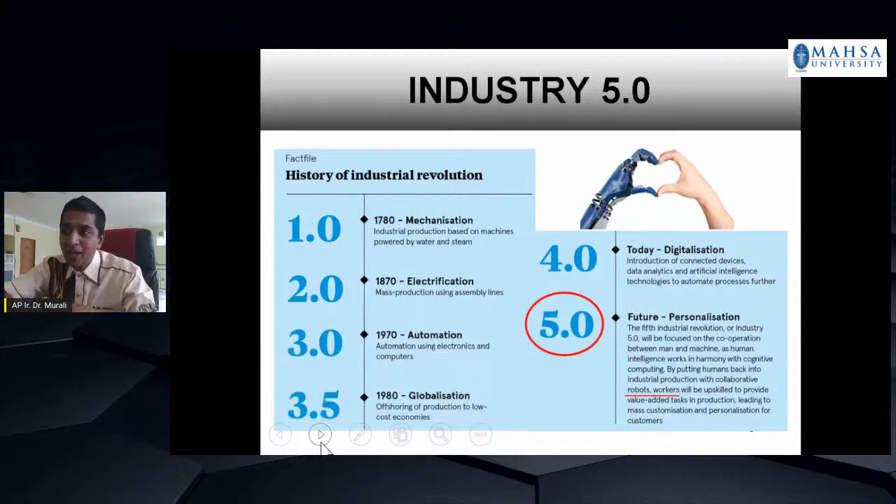So that's what I want to highlight here. What I want to share with you today is a bit of an overview of robotics. I will talk about the history of robotics, because we need to know where it started and why it's going in this direction. Then how they classify robots, some basic applications of robots that are very important nowadays, and also some essential preparations we should all have to be ready for the coming future.

Now let's look into the overview of robots. Robot history started in 1921 with Karel Čapek. The word 'robot' actually came from a play. 'Robota' means servant, or subservient labor.

So in this play, they created an electromechanical robot to show that it's possible. This was actually the first introduction of robots in the world. It came from a play.

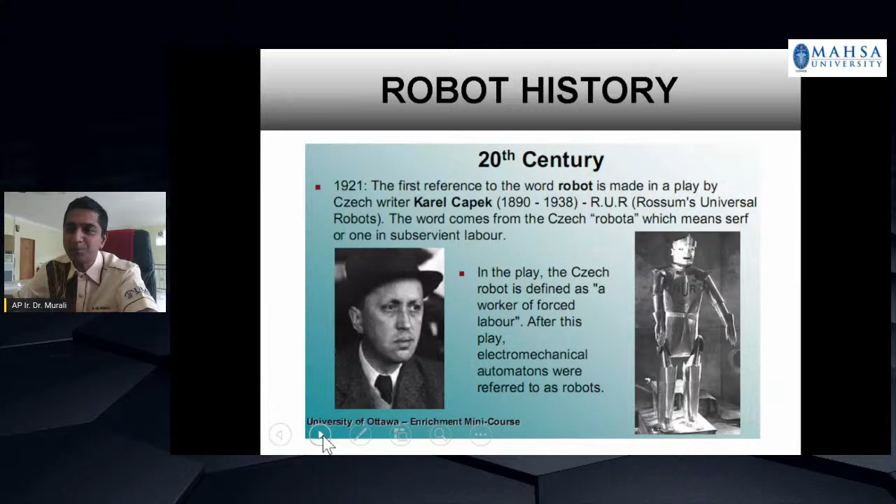Then in the 20th century, in 1940, 20 years after 1920, the first robot was created by Westinghouse Electric Corporation. They created a robot and its dog companion, named Sparko. This dog can walk, stand, and bark.

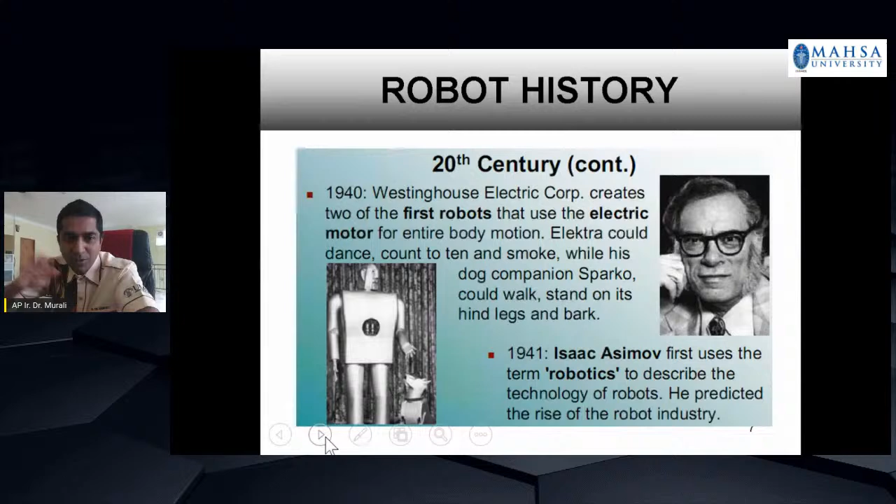In 1941, Isaac Asimov, whom we call the father of robotics, coined the word 'robotics,' the technology of robots, because he saw that robots would rise in the very near future.

Then in 1968, 20 years later, we have the first mobile robot, created by Stanford Research Institute. This robot uses a camera, rangefinder, and sensors. It's called Shakey, the first mobile robot that could think and respond to the world around it. That was a great breakthrough.

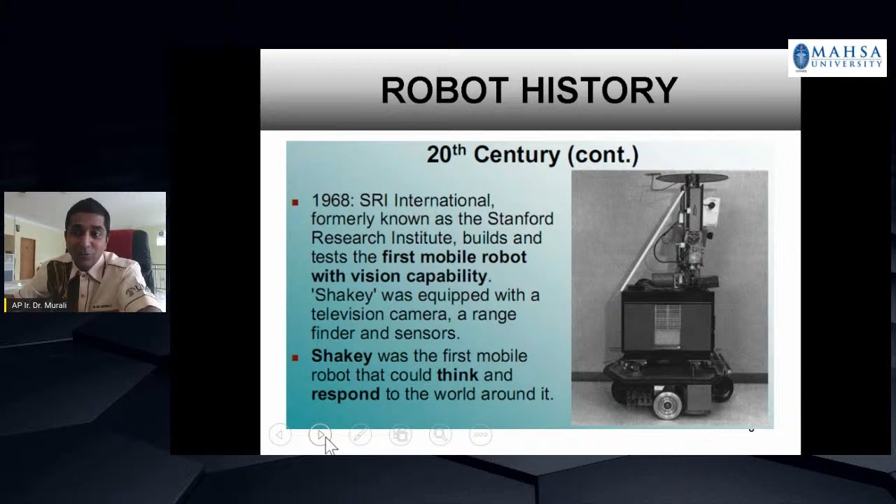In 1969, again at Stanford University, they developed the first electrically powered, computer-controlled robotic arm. Professor Sheinman later, in 1974, founded the Vicarm Incorporation. This arm is actually used in industrial robots, for assembly.

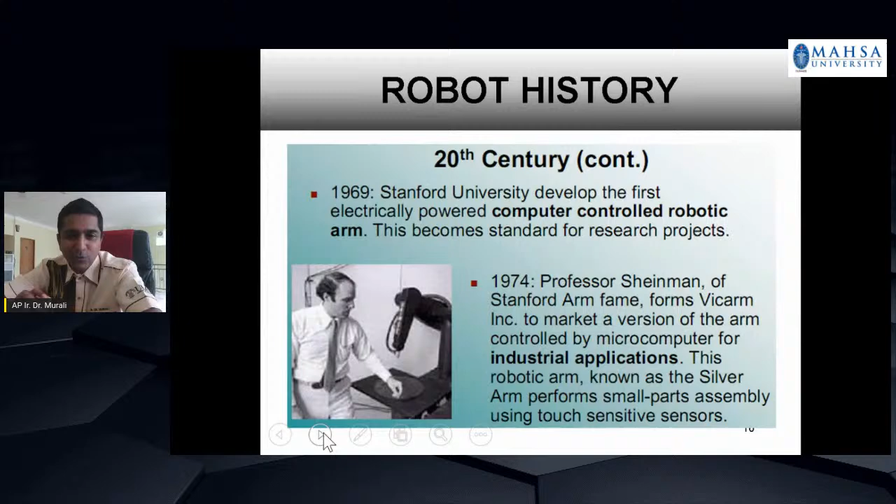But the first robots were actually used for welding, because welding is very dangerous - gas welding and metal fume - so it's dangerous, dirty, and dull work. Basically, robots were created to address these 3Ds: dangerous, dull, and dirty. If you can put something there to do all this job, that's where the robot came from. That was the initial part.

Of course, we watch movies, right? You can see how people imagined technology developing into the near future, like in movies such as Robocop, Terminator, Transformer, Knight Rider, Real Steel, Stealth. All these things exist now, but not like what you see in the movies - they are there, being applied, and being developed.

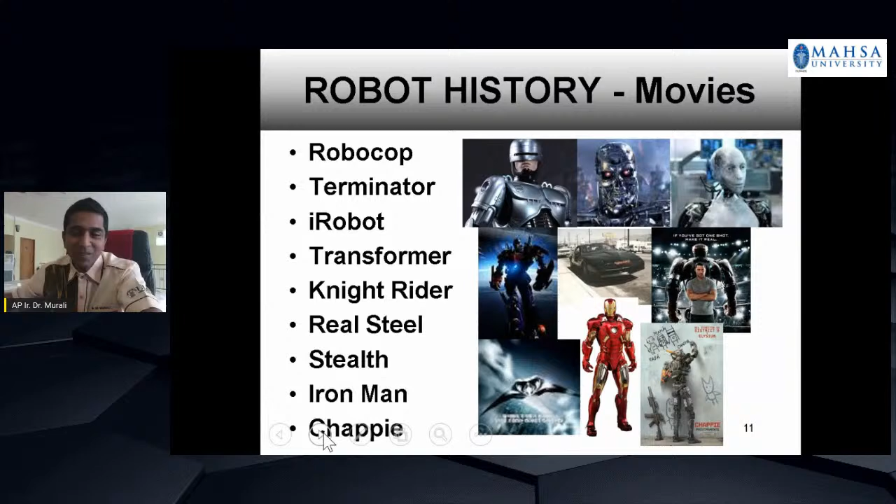So these are the interesting parts. Now, how do they classify robots? How do we classify robots?

First, I introduce to you Tele Robots. Tele Robots are those guided by remote control by a human operator, like a remote control car or remote control airplane. You control the robot, so we call it the Tele Robot.

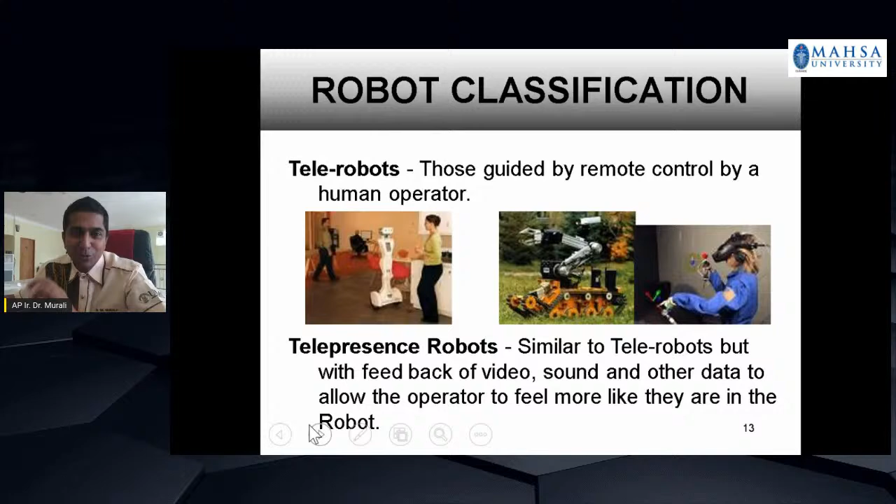Now there is another one, telepresence. Telepresence is also a tele robot, but it has visual feedback, video feedback. That means you can feel that you are actually driving the robot, or that you are the robot moving around and doing things. Later I will share with you the applications of it.

Then the other one is the static robot. This is where it started from. It's widely used in industries, factories, laboratories - it's an industrial arm that does a job.

Then we have another one, the mobile robot. This one moves around in the environment, so it can navigate by itself without any human intervention. It uses tracks, wheels, and other platforms.

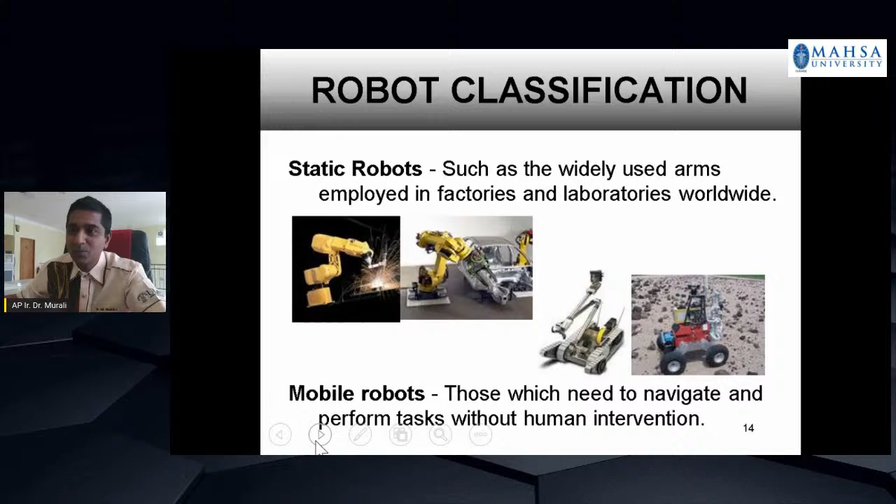Then we have the autonomous robot. An autonomous robot is a robot that can do the work on its own - you just program it and it does the job by itself. We have lawn mowers, we have the Roomba, a vacuum robot that can vacuum your house. All these things do work on their own, that's why we call it an autonomous robot.

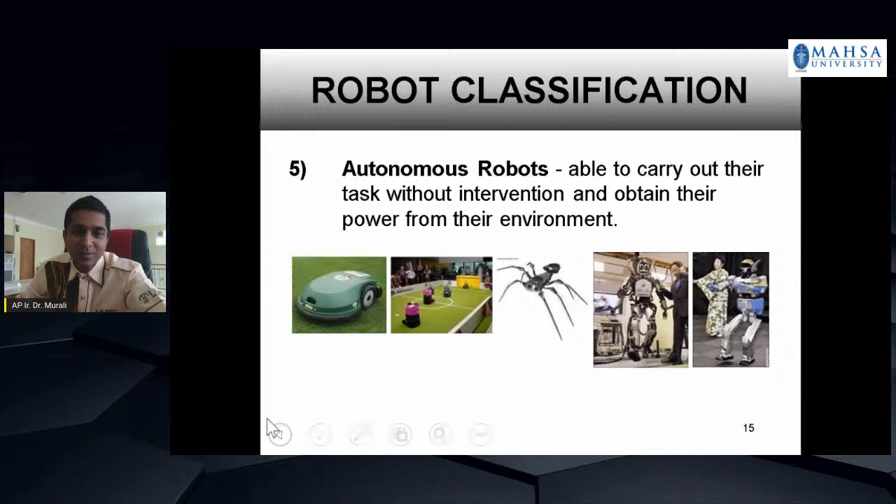Then we have what we call aerial, underwater, and space robots. Now, all of these are also mostly autonomous. They have to have some degree of autonomy, because in case the signal or communication is cut, they must be able to navigate by themselves, make decisions, and maybe return to the home base.

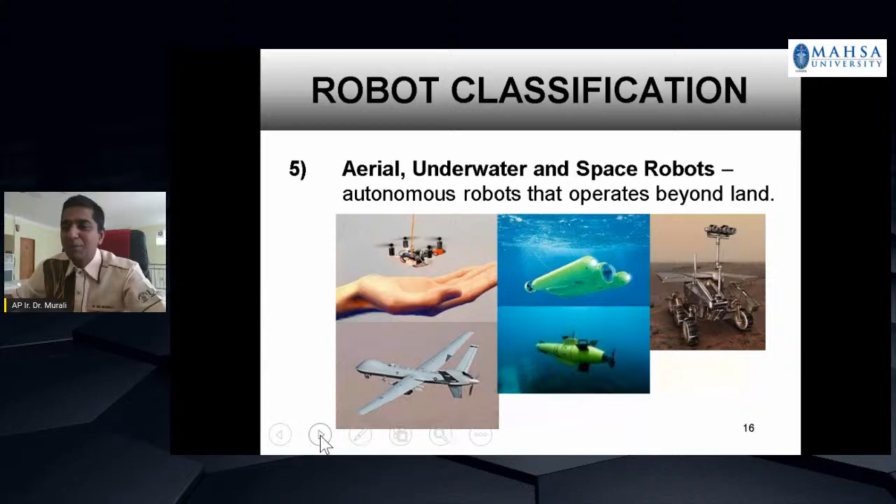So you have deep sea underwater vehicles, tiny drones, and big drones that do military tasks. And then you also have the Mars rover, which is sent to Mars, which definitely has to be autonomous and has to communicate with people on planet Earth. And then we also have androids.

One of the most advanced androids that we have currently is Asimo, by Honda. Asimo can climb stairs, can hop on one leg, can kick a ball, can run, and can recognize things.

We also have Sophia, who is the world's first robot citizen, where it has a very high human-like behavior, maybe not physically, but intellectually. And we have NAO, the toy robot or educational robot that we can use to learn and also to do research upon. So there are many types of androids available in the world, and these are some of them.

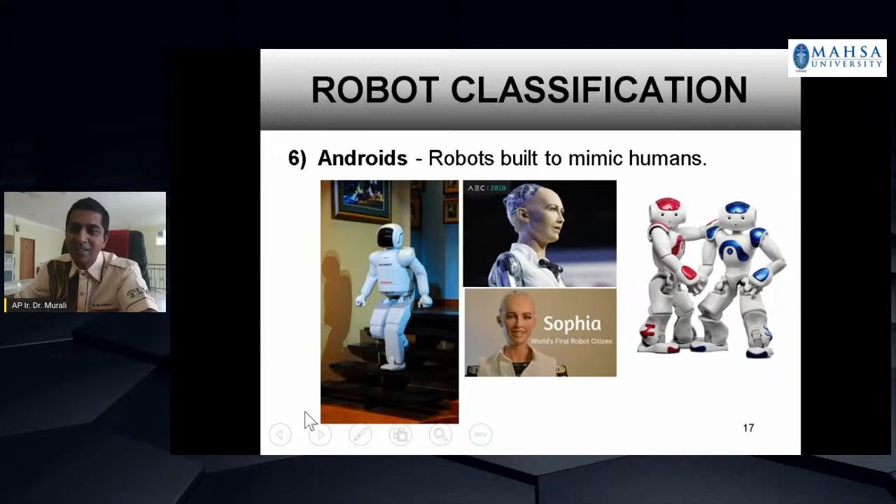Something very interesting: we have restaurant cooking robots. The restaurant name is Spyce. As you can see in the picture, this is the restaurant where people sit and order food, and then the robot cooks by itself. It puts all the ingredients in, cooks, and serves. There's only one chef; he will check everything is okay and make the final touch. Every meal is customized for you—of course there's general cooking, but it's customized for you. So the sprinkling work is done by the chef, only one chef. That is why I said that in the future, you still need a human being to do the final touch.

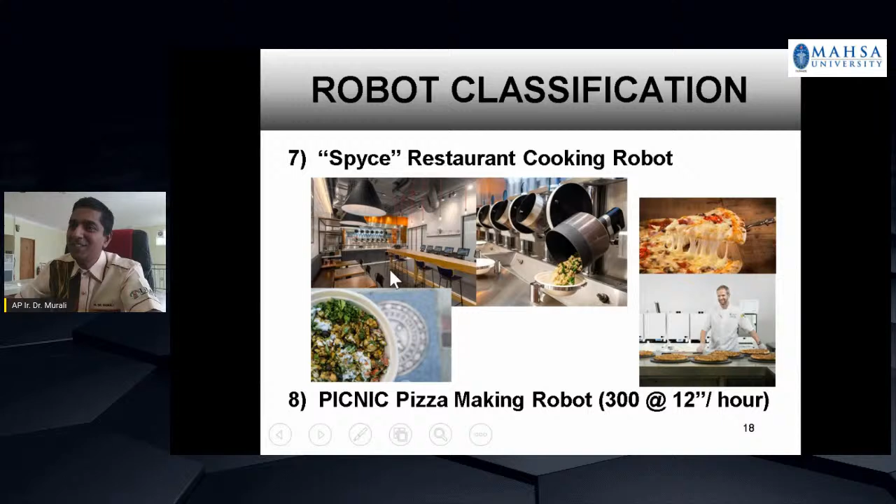We also have this PICNIC pizza-making robot. Imagine a robot that can make 300 pizzas, which is 12-inch size, quite big, in an hour. This robot can do that repeatedly. So these are very interesting robots that we have in this world.

And of course, where all the money is spent, where all the technology is currently being developed, is mostly on military robots. We have drones, military soldiers, alpha dogs—big dogs to carry things—and then automatic tanks which can go and target enemies, and automatic sentries, which they use at the borders.

And then we also have medical robots, which I will share with you a bit deeper later. We have robots that can operate on people, robots that can sanitize places. And also we have pet robots. People who don't have pets, who cannot have dogs because it's a bit messy, they have pet robots which interact with human beings, can be programmed and made to do whatever you want, so that small babies or kids with disabilities can learn to become normal again through these pets.

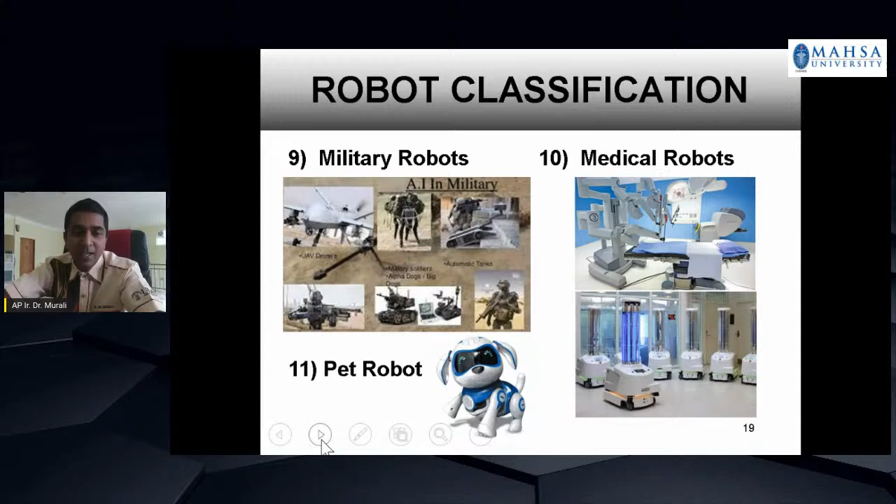So that is what robots are all about, how we classify robots. Now let us look into the application of robots. First we will look into industrial robots, because industrial robots is one of the widely used robots in the world—manufacturing and all these things really use industrial robots, so this one we cannot run away from. When a person wants to study robotics, if he really wants to know the architecture, the application, the concepts and everything, we normally start with industrial robots.

Then we go into mobile, because mobile uses different platforms. But industrial robots has a very unique understanding. So why industrial robots? You can see here, this is in 2017—this statistic is from the International Federation of Robotics. You can see how much robots are actually being used, and it's replacing employees. On average, the global average is 85 robots per 10,000 employees, globally in the whole world.

We have a lot of usage of robots in Korea, because in Korea one of their greatest revenue generators is in the field of robotics. That is why in Korea, one of my colleagues shared with me that every state in that country has a university that works on one special type of robot—maybe one state works on medical robots, one on industrial robots, one on some other type of robot, to generate revenue for the country. That's why the technology is advancing so fast. Of course, Singapore and now China is picking up, and China has already gone very far too, using robots in industry very widely.

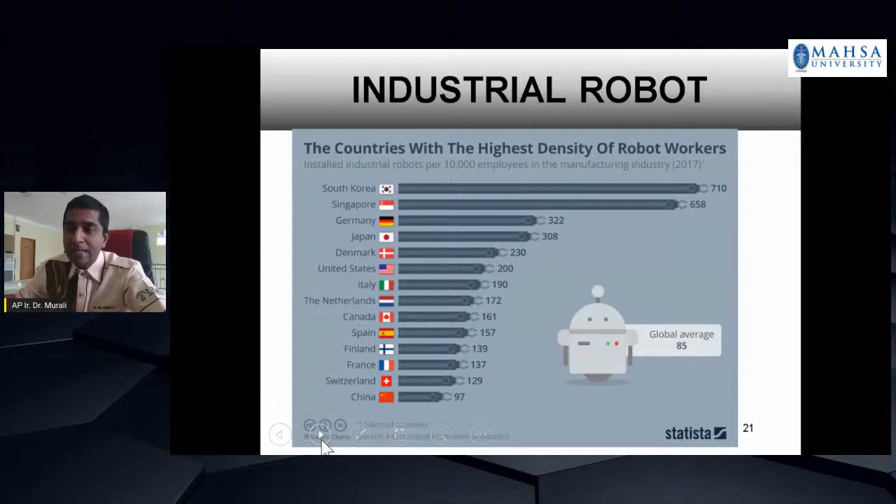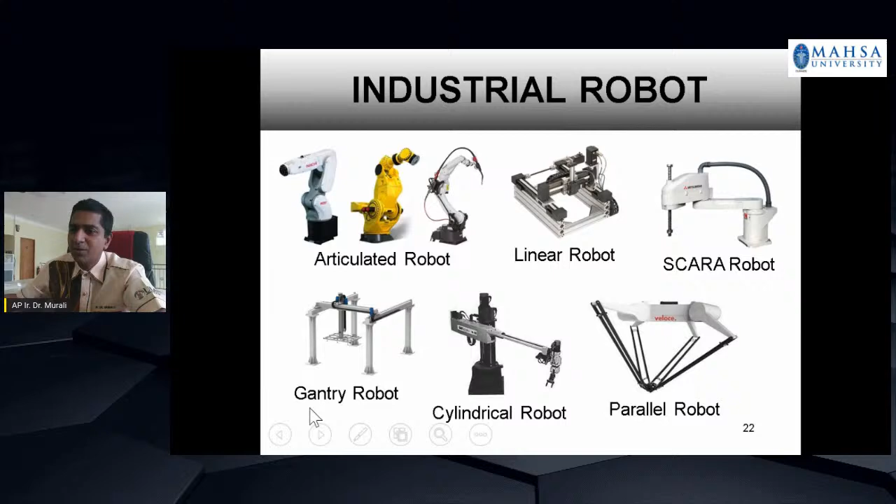So this is about industrial robots. Now, the latest trend in robotics mostly works on the area of collaborative robots. If you have an industrial robot arm, it's very dangerous, because the robot moves very fast and doesn't have any sensor to detect whether you are there or not. So they have fences, a workspace you cannot enter. It's very dangerous. So now we have collaborative robots.

Another one becoming very popular nowadays is drones. We have material transfer robots, automated guided vehicles, and drones. Nowadays people are buying online for many reasons, not only because of COVID. Even before COVID, people started buying online, and we have big factories, stores, and warehouses where we need guided vehicles to pick up objects or purchases, and robots to transfer them.

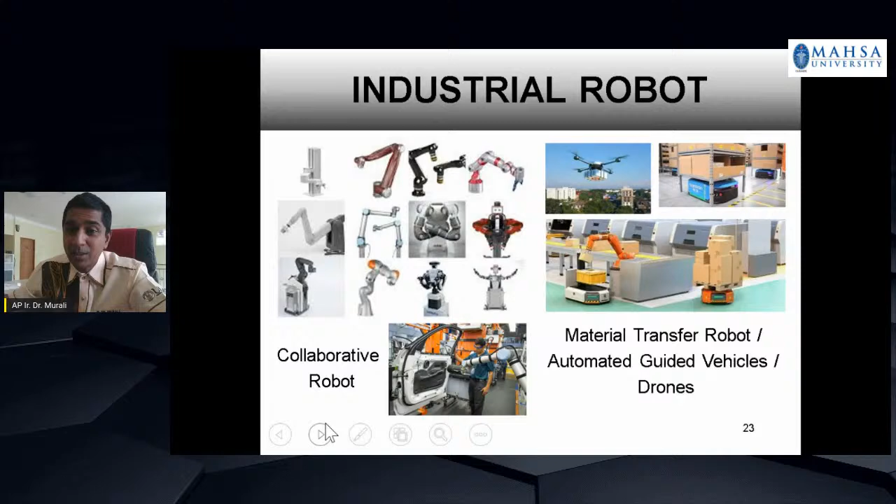If we study industrial automation, we learn that around two-thirds of the cost of the industry or product actually goes into material transfer, either from robot to robot for manufacturing, from robot to customer, or from the source to the factory. So when you use robots, you generally reduce the cost of the product you are buying. That's why many things we buy online are very cheap, because they've tried to minimize cost by using automated systems and robotics in their warehouses and other areas. These are the things we've covered, and it's still developing.

Now, industrial robots are used in a few key areas. The first is material handling, like material transfer, pick and place, palletizing - meaning arranging the materials, products, and output - and machine loading and unloading. You use robots to load products to machines and also unload them. Robots can do this very fast, very clean, and very accurately.

For process operations, you have welding, spray coating, cutting, and grinding. For assembly, you have fastening screws and nuts with multiple orientations - it can fix up, down, left, right, at very fast speed.

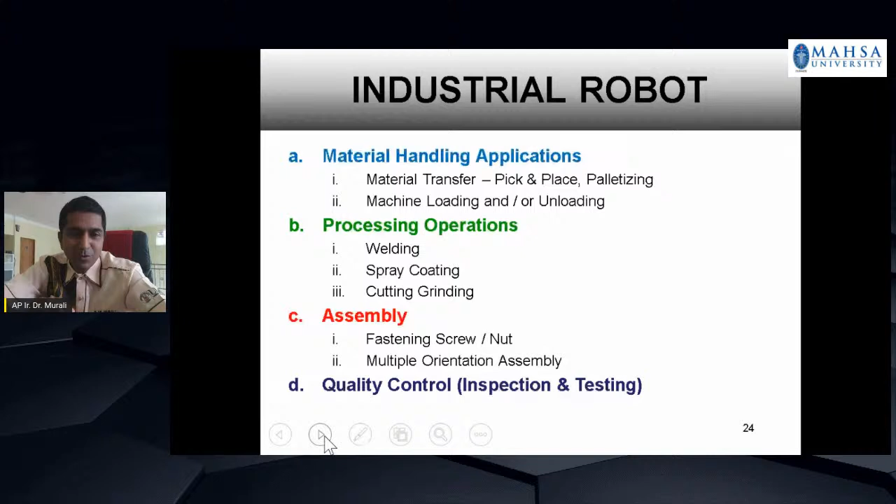Robots are also used for quality control, inspection, and testing. We have many robots, and they have been using it for many years. Because of this application of robots, we have products which are very high quality.

This is a guide to show automation and computing, which involves robots working together hand in hand, because you can design something virtually on a system. We call it computer aided manufacturing, CAM. You can design it, do prototyping, then 3D printing, and then production. All these things can be done by robot: prototyping, printing, and production.

Then of course you have assembly, and you can see now we have blockchain involved. And then you have delivery. You have robots to deliver, tracking, and also distribution. And robots sometimes also do customer service.

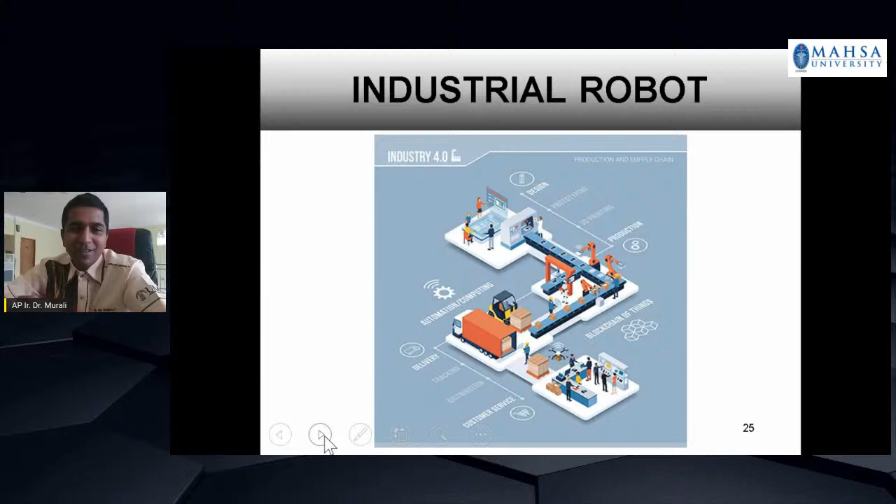Sometimes you open your website and you have somebody to talk to you who is not a human being. It has some intelligence, a software robot, where it communicates with you. So these are the things that we have in industrial robots. Now let's look into other applications of robots.

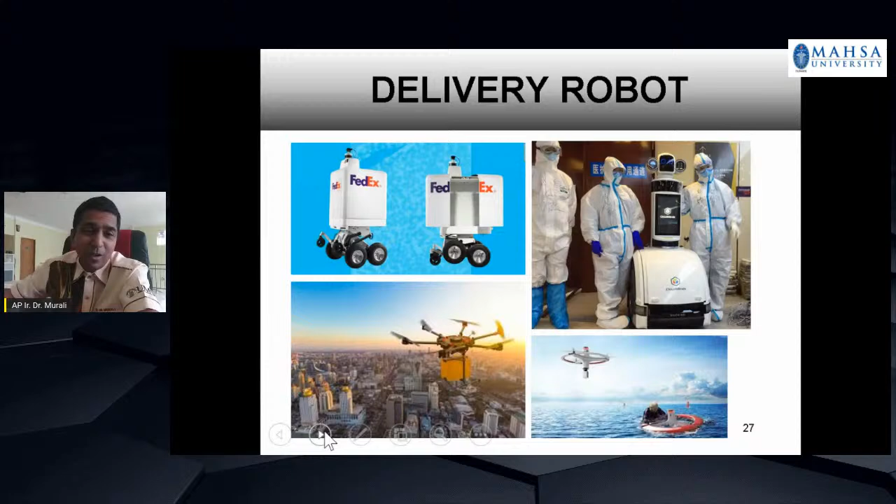The one which is going to be very useful in the near future, or currently being used widely, especially due to COVID, is delivery robots. Robots have been used for delivering food and items that you purchase, on the ground, aerial, and especially in hospitals, especially when you have COVID. The famous one is a billion-dollar market nowadays, because you have a lot of robots that deliver to you on the sidewalk.

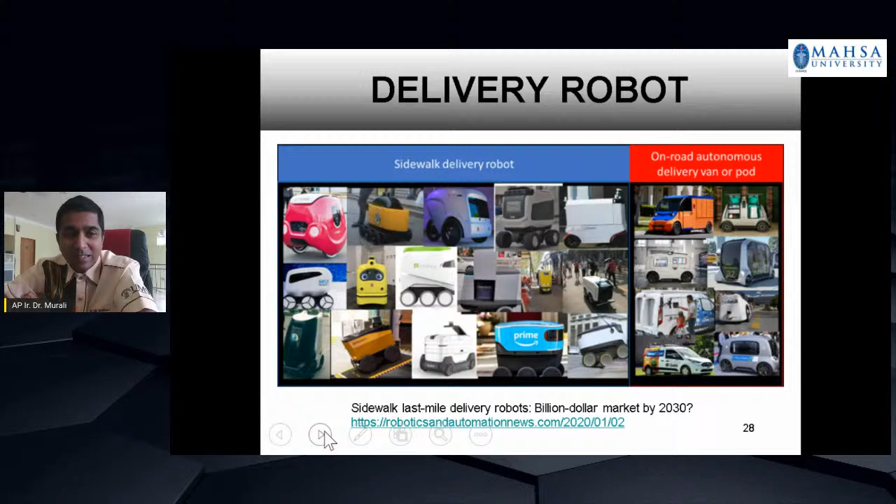And then also you have robots that can drive autonomously, an autonomous driving vehicle that goes and delivers things. Now they have driverless trucks that go on highways, controlled by satellite and a remote driver, but the driver always puts it on autonomous mode. Only in an emergency does it take over, but it runs automatically.

The second one that is going to capture everybody's attention in the near future is swarm robots. A swarm robot can communicate with other robots of a similar type to accomplish a task. As you can see in the example, these small robots, if they want to cross an obstacle, will make themselves into this robot type and cross the obstacle. So it has that intelligence to collaborate and do something, to collectively complete a task. You don't need a complex algorithm, and it can change with the changing environment.

Nowadays you have swarm robotics in terms of swarm drones, which can travel in a group for search and rescue, for surveying purposes, for mapping purposes, and also they use drones for shows. Like you can see there, the airplane shape is made of drones. You fly the swarm drones, and then you make whatever image you want in the sky. You can do magic there.

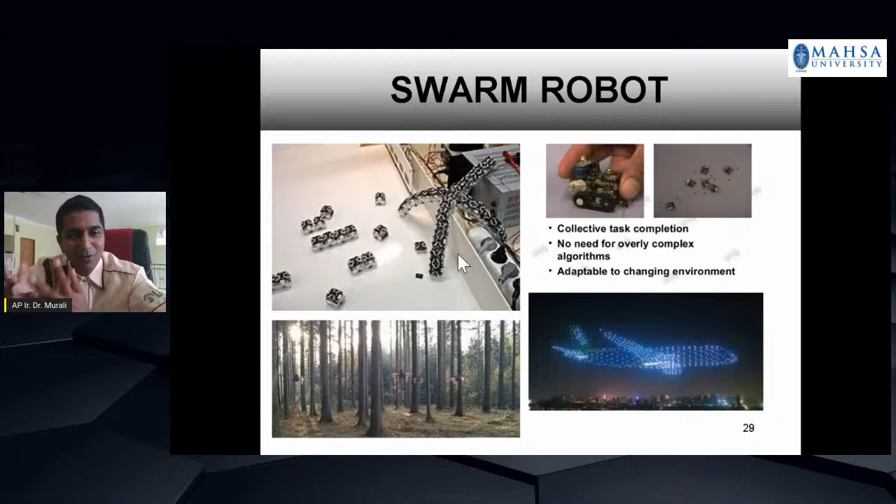The next one, which is very important nowadays, is the robot used in the medical aspect. Medical robots are very advanced, because medicine uses robots to do operations. The advantage is that you can have many arms, and you can have tiny incisions, and the robot can do a very delicate job.

It can go very deep, better than what the surgeon can do. Another aspect is that the robot can have the surface mapped, and then you can have soft limits. Sometimes you have nerves somewhere, and if you want to do an operation, you might accidentally cut the nerves. If you have robots, you can tell it where the nerves are, and the robot will not cut them. It will stop, even though the doctor moves it, the robot will stop. It will have a stop limit.

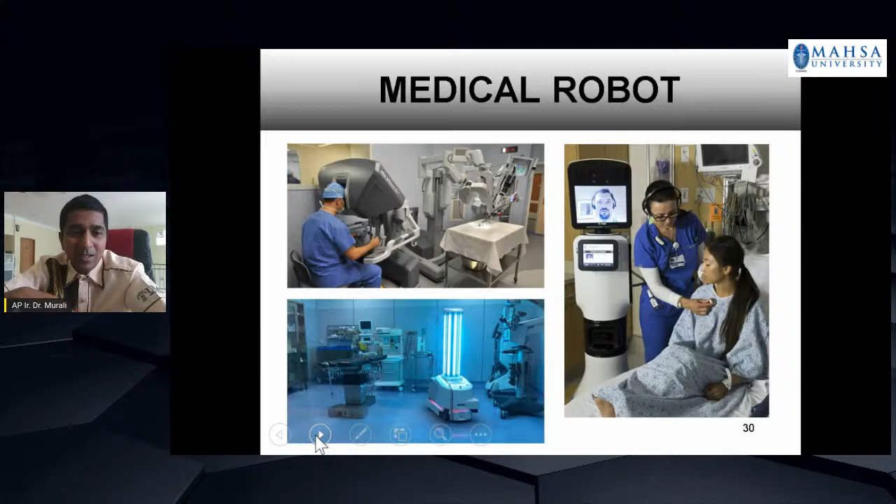It's developing now. We also have disinfection robots, because due to COVID, if a patient is there and you need to disinfect the whole room, it takes time, even a few days depending on manpower. But with this robot, using ultraviolet, it can clean up the whole place in a matter of minutes, so you don't have any infection. The operation theater or room can be used immediately after, and the things you bring in or transfer to patients, like medicine and food, can be disinfected by this type of robot.

Another aspect I was sharing with you, the tools. You can see the tools are actually very small, about the size of a 1 cent coin. It's very tiny, but it has a camera, it has degrees of freedom where you can move it, and something to hold.

And then also you have these nano robots, the size of a blood cell, very small. They are developing these nano robots for many applications now. They can target cancer cells, they can target diseases. And we also have robotic capsules which go inside your body.

It has a camera that can take pictures of the intestine, and it can also open up. The pill can be activated to do other things, it can inject medicines, release medicine at a particular time and place, and it can be monitored externally by the patient and the medical practitioner.

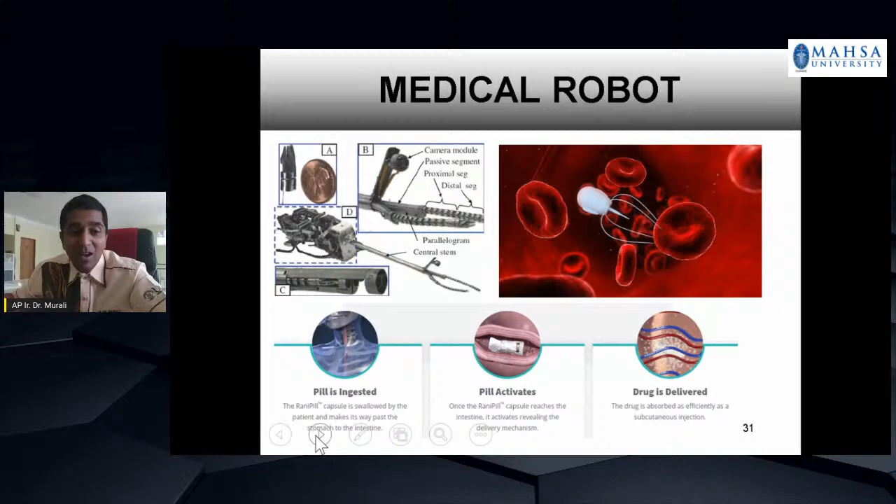So these are the advanced parts of robots that are actually developing. Nanotechnology is currently picking up pace. According to the Journal of Evolution of Medical and Dental Sciences, they also have nano robots for dental treatments, for cell repair, cancer treatment, aging, heart disease, and implanting devices.

Virtual reality means the robot goes into your body and the doctor can see it as a virtual reality, moving things and seeing what is actually happening inside. You can do gene therapy, drug delivery, stem cell placement, bone repair, imaging, diabetic treatment, surgeries, and they also use nanorobots for seizures and many other applications.

So a human being who has a lot of problems on the left hand side, you can use nanorobots to treat them on the right hand side. These are the applications currently being worked on, and some of them are very successful.

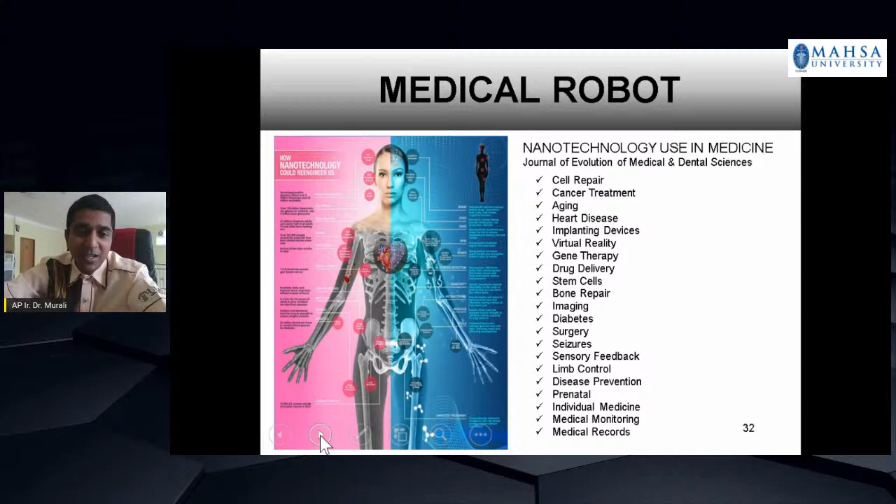So what are the things we need to prepare? How can we embrace robots in the 21st century? What are the things we as normal users of robots need, or what skills do we need? Because in the near future many things will use robots, maybe not directly, but indirectly you will use robots. So you need some skills to prepare yourself for the future.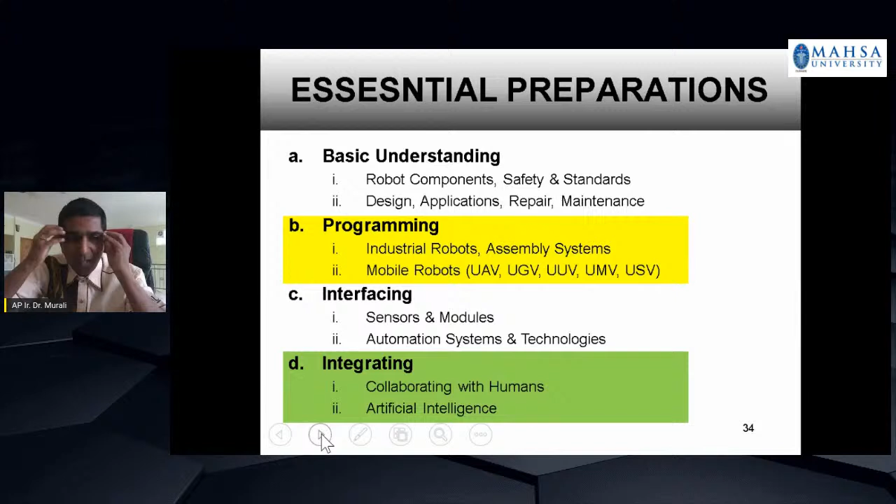We encourage even children from a younger age to have a basic understanding of robots. We have started even in Malaysia, robot education, even in primary school and preschool, to give them a basic understanding of what robots are, because they are growing up with smartphone technology now, but in the future they will grow up with robotic technology. Imagine in the future your kids will be picked up by automatic cars, sitting in the car and just needing to think where they want to go, and the vehicle will take them there because the sensors are on the seat.

It's not hooked up to your brain. You know how we have artificial prosthetics, robotic limbs, where the signal is taken from the part of the body. So when you sit in the car, all the sensors on the seat take the image, take the information. So you have a lot of big data there, and you process it, and then it can decide where you want to go, how you want to go, which route you want to take. You can think and it knows.

So these are the things that are currently being developed, and it will be there in the very near future. So we need to prepare kids nowadays so that they are ready to use them, ready to design them, ready to apply them, ready to repair them, ready to maintain them. And also we need to give them some safety standards and other things. So this exposure is very important for us.

Programming: industrial robots need programming, assembly systems need programming, mobile robots need programming, unmanned aerial vehicles, unmanned ground vehicles, unmanned underwater vehicles, unmanned marine vehicles, unmanned surface vehicles - you need to program. And when you have robots, you have interfacing - you interface with sensors, modules, you interface with automation systems, you interface with new technologies, emerging technologies, and also you integrate them.